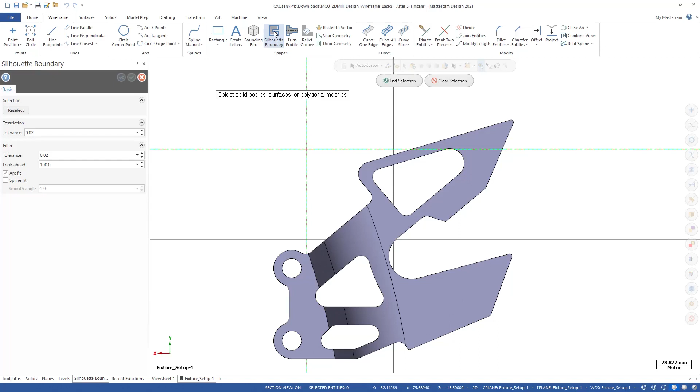I'll select the solid and then End Selection. The Silhouette Boundary function panel appears, and as you can see, there are options for tolerancing and whether to fit arcs or splines. I'll accept the defaults and click the green OK button.

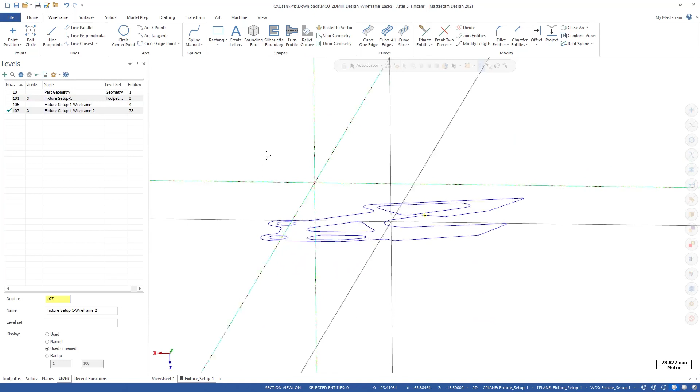In the Levels Manager, let's turn off Level 10 to hide the part, and we'll see that we created a silhouette boundary around the chain guard part.

Now let's explore some different geometry creation tools. The end result is I want to create another rectangle. So let's go into our Lines tools, and we're going to create a line using line parallel.

Following the prompt, it asks us to select a line, so I'm going to select this line right here. Now it says select the point to place the parallel line through. I can click anywhere, but I could also snap to other geometry such as points or any tangent entities.

For example, if I change this to tangent, now I can select this line or this arc here, and it would be tangent to that.

Same thing down here. If I click this arc, now you notice this line is at a precise value of 13.04396, because more specifically it's tangent to that arc.

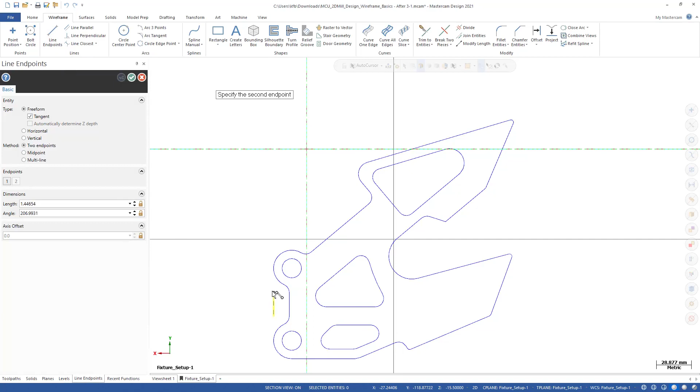Let's click OK and investigate this. Just to do some quick checking, I'm going to create a line right from here, go up here, and if I zoom in, we can see it is in fact tangent, and that makes sense because originally we created the parallel line tangent to that.

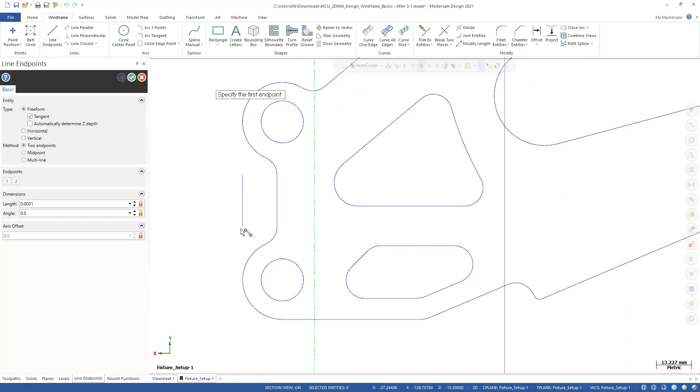Let's hit undo, and let's do the same thing down here. So another line, snap from here down here, and you'll notice this line is not actually tangent, right? It doesn't touch the arc.

I'm going to go ahead and delete that line by selecting it on the screen and hitting delete on my keyboard. We can also use some modify functions to extend and break this line we just created.

If I go up to the modify group on the wireframe tab, I can choose modify length. Since we're in millimeters, let's change this to 20 millimeters. This is the distance we're going to be extending, and in this case we're lengthening the line.

I simply click on the line and you'll see that it gets extended. I click it again and it gets extended. I can do the same thing on the other side, and notice you click closer to the end that you want to extend, and it will then extend that line.

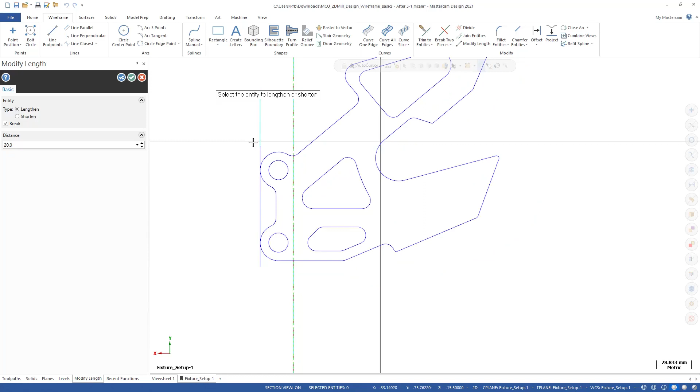If you choose the break option and then do it, you'll notice that it extends the line, but that 20 millimeter line I just created is a separate line. It's not connected to the original line. So these are some tools used inside the modify length option.

I'm going to go ahead and select these two and hit delete on my keyboard since I don't need them.

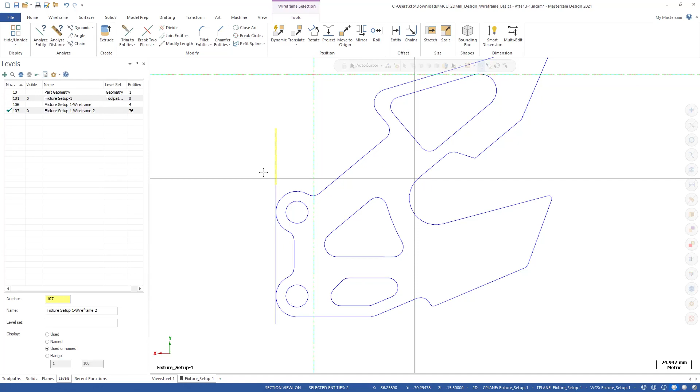Our main goal is to use this line in conjunction with another line on the opposite side and a line on the top and bottom to create another rectangle. Now, what I've seen people do in the past is use this line down here as the bottom line for their rectangle or square. I would recommend against doing that, and here's why.

If we continue to use this line, I could go down here and create a line right from here across to here and then trim it up. So this line would end here and then continue on over here. Well, the problem is this piece of geometry is now shared with two different shapes - one shape would be the silhouette boundary and the other would be the rectangle. So I'd recommend using a completely separate line for that.

So here's how we do that. I first click OK and then hit undo. In this case, if I want a line that goes across the bottom here, I'm going to go to my line endpoints tool, and I'll create this line right from here this way.

Now I can use that extend tool or the modify length tool like we saw. Let's change this to 200, and modify this length. Notice it goes all the way across the bottom. So now we have two lines on top of each other - one shorter, part of the silhouette boundary, and one longer, part of the bottom shape of the rectangle. Before I click OK, I want to make sure this isn't set to break, because I want this to be one solid line. So I click OK, and I'm all set.

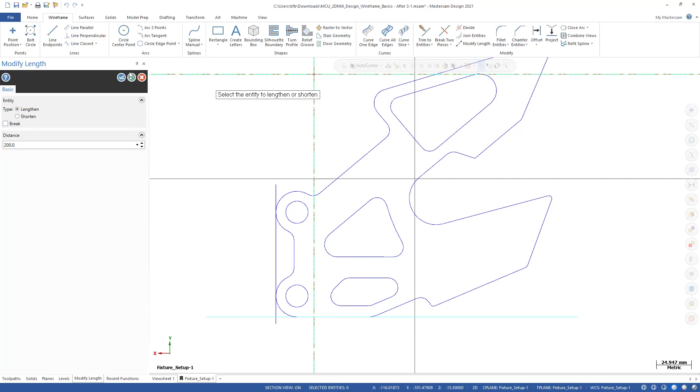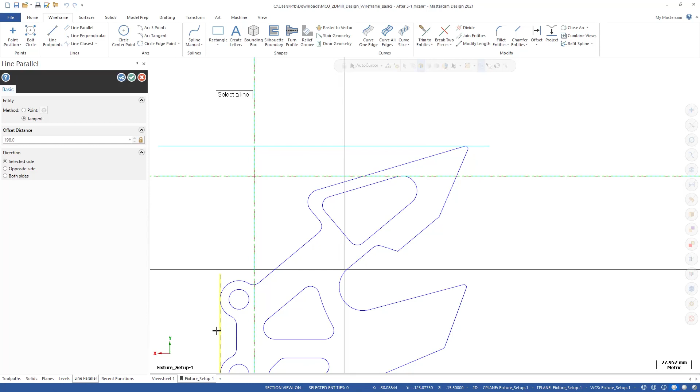So now let's create the top line. The simplest way of doing that is creating a line parallel, clicking this line, and then snapping to this tangent line up here, or this tangent arc. Same thing with this line over here - we're going to snap it right to there. So now we know a tangent. I'll fit it to the screen.

Now I have the beginning of a square or rectangle here, and what I'll use is the trim tool to trim these up. So I go to my trim entities command, and I'm going to set my trim to trim and my method to auto. The way this works is quite simple.

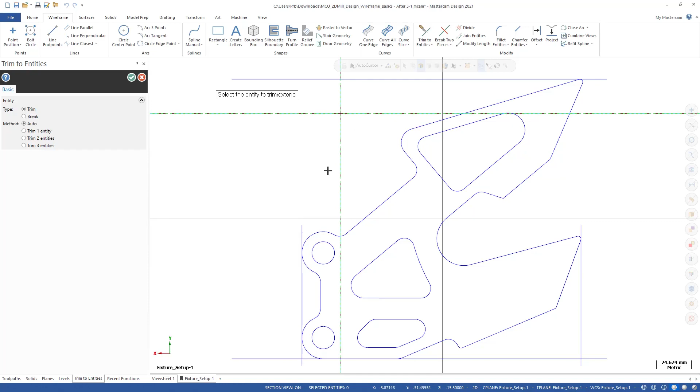You first select the geometry you want to trim, like let's say this one, but you select the area that you want to keep. So I wouldn't select here because I want to get rid of that. The step is you select what you want to keep, then select what you want to trim it to. In this case, I want to trim it to this line, and you notice it removes that entity. Same thing here - I want to select this line and trim it to here, and it removes this.

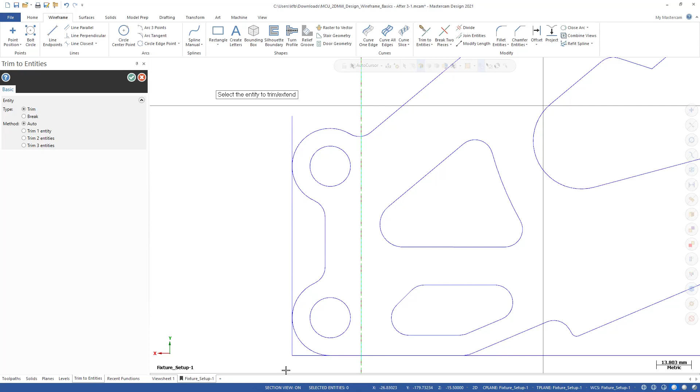Now the trim command will also extend. So if I zoom out, I can select this line and trim it to there, and you'll see that it actually extends it. I'll trim this one to here. Same thing with these, and then these two down here.

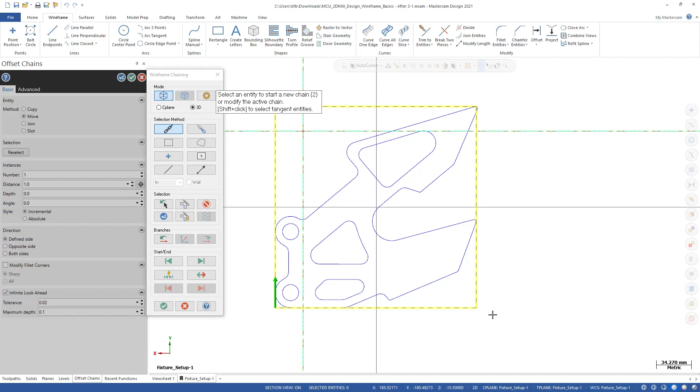So now we have a rectangle, or possibly a square, that completely surrounds this part. Let's finish this up by doing an offset chain like we saw before. Select this geometry, and I get confirmation that the entire outside shape is selected. If it's not selected, that means I might have a gap somewhere that perhaps I did not trim properly. I click OK, indicate the side, and I want to do 1 millimeter, move it, and I'll keep modify fillet corners off. I click OK, and now my new rectangle or square is a little off of this shape.

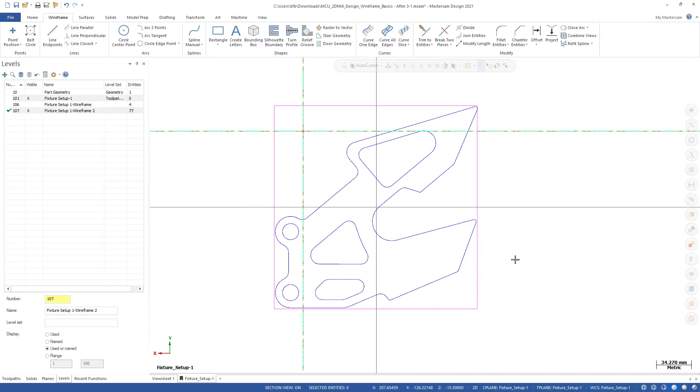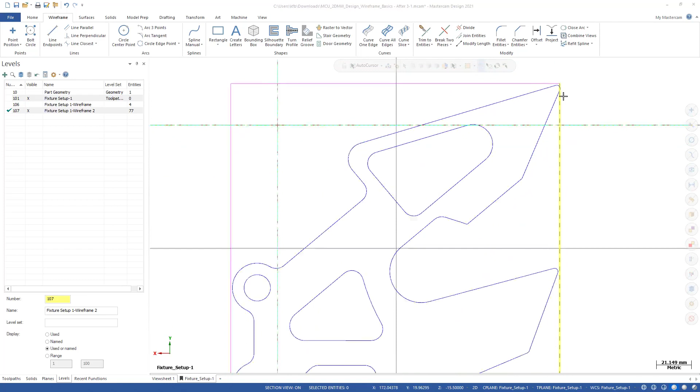Let's right click, hit fit to screen. Now I did notice up here we have a little bit of an overlap, and that's not a big concern here, but if I was to do this again, I might create the geometry differently and make sure that I'm snapping to this arc as a tangency as opposed to this arc. So this was another way of creating geometry to surround this part, and we'll explore another method in the next lesson.